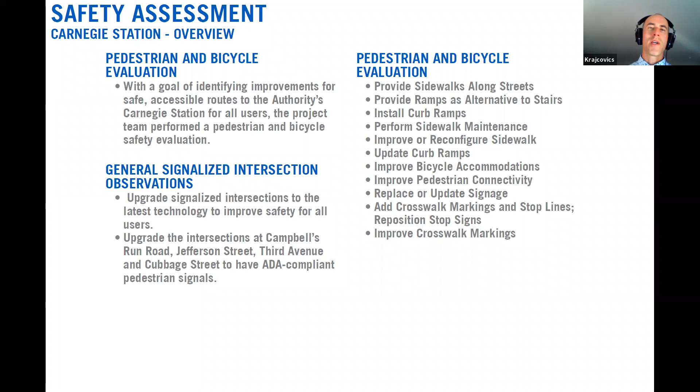Safety recommendations shown here in the bullet list to the right include installing ADA compliant curb ramps, performing sidewalk maintenance, improving bicycle accommodations and connections, and replacing and updating signage. There's also some opportunities for some signalized intersection improvements, specifically along West Main Street that we had noted as well. The following couple of slides will give you a few examples.

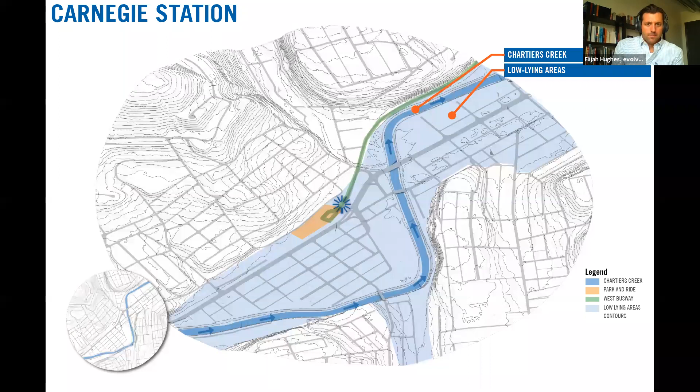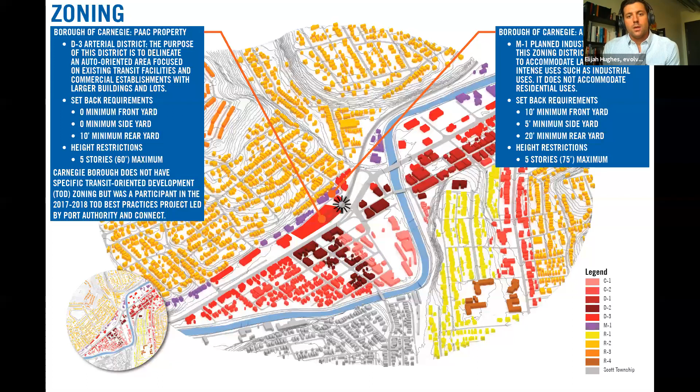You can see everything within that low-lying area on either side of Chartiers Creek, and along East Main Street in particular, is where a lot of the most active uses are within Carnegie Borough. These are the types of uses we'd like Port Authority's Carnegie Station and garage to be well connected to, so people can easily include shopping and working at Carnegie businesses into their typical commute patterns and trips on Port Authority's West Busway. Next slide.

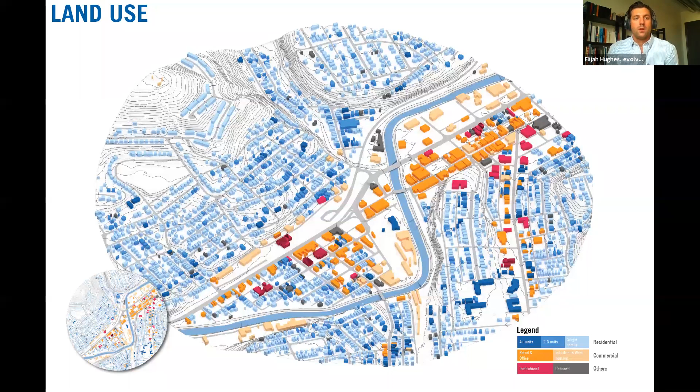So we're looking for how we can improve the places where people can walk, so that when people are getting to the station, it's an easier walk, a safer walk, and a more attractive way of getting to public transit. Next slide.

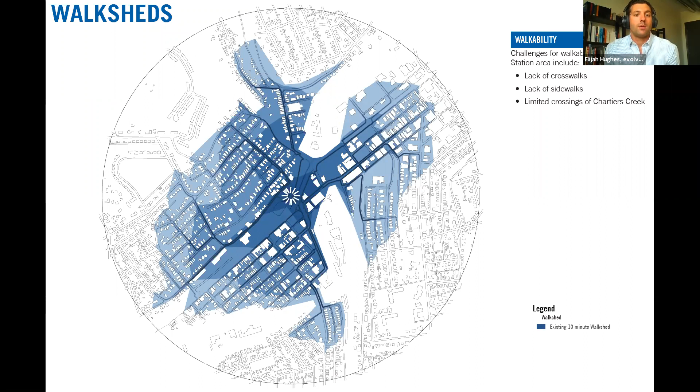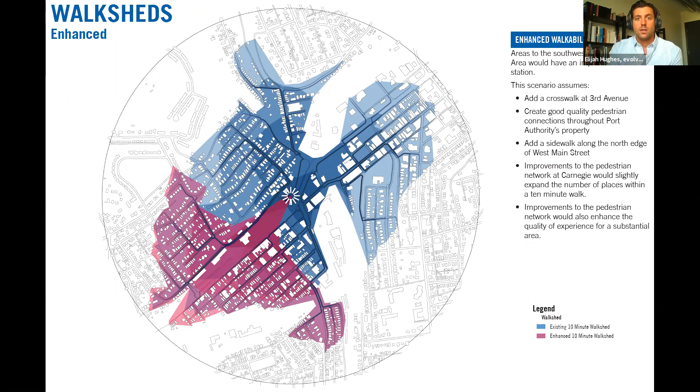Next slide, and I'll hand it off to James. Thank you, Elijah. So as you saw on the previous slides, we looked at the area, zoomed out to the half-mile walking radius. Now we're going to zoom into the site to look at some of the features that are directly affecting the park and ride area.

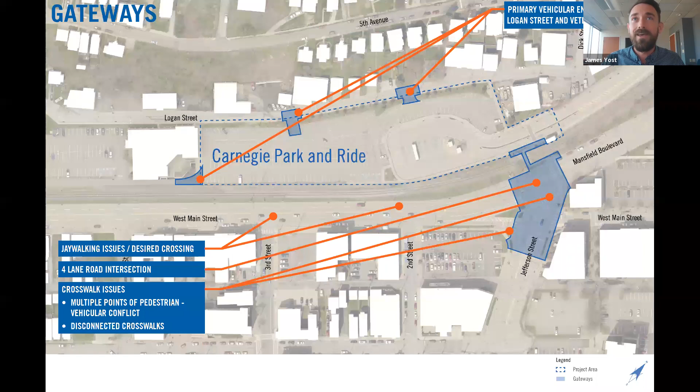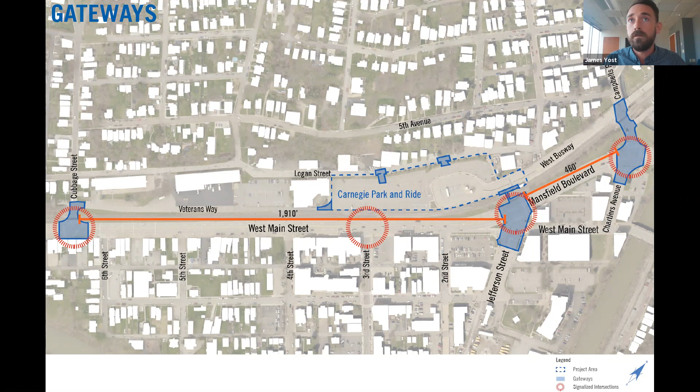And then to the other end of the page, we have the intersection at Campbell's Run Road or Chartiers Avenue, noting how that would be an additional 460 lineal feet from that Jefferson Street intersection.

Zooming into the site a little more, some things we were able to analyze as we got onto the site, looking at opportunities and challenges present today. The park and ride is a surface lot that's roughly 3 acres including the bus turnaround loop, which allows for good flexibility for future placement and construction of the parking structure, which you'll see soon. It's also a very flat lot.

It's something we don't often get in Pittsburgh, but it's a good opportunity at this site in particular. What Carnegie Station also has going for it is significant daily ridership. According to calendar year 2017, weekday average stop use topped almost 1,000 daily users, so that's something to pay attention to.

We also have good access to local infrastructure at Carnegie, providing an opportunity for constructability of the parking garage, as well as potential future TOD. We also want to look at how we can enhance the site overall, including the operation of the facilities of the bus turnaround at this location.

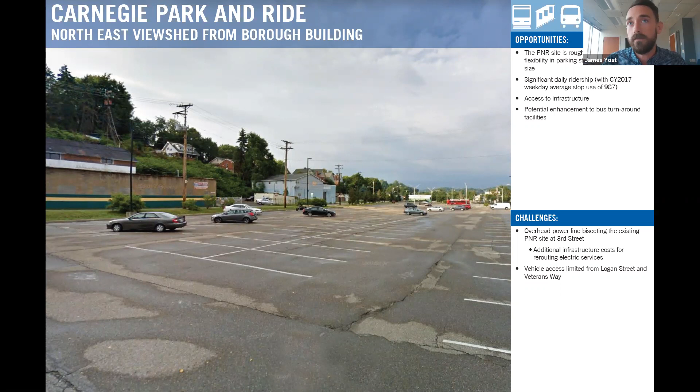Some challenges we do have are the overhead power line that bisects the existing park and ride site. This power line crosses over right at 3rd Street, which could provide additional cost for infrastructure changes in the future if the vertical garage goes in that location. Vehicle access can be considered somewhat limited, as the main points of access are from Veterans and Logan Street.

Turning our viewpoint back towards the Borough Building, some things we can take into view here are our proximity to the Borough Building and its associated on-site employment demand, which is an opportunity for us. The site also has great frontage along West Main Street, with high average daily traffic of over 10,000, which would be very important for any potential commercial tenants to develop on this site.

We do have the non-active rail line located directly adjacent to our site. This is considered both an opportunity and a challenge as it is today, but we realize it would be very beneficial for the Port Authority and the Borough of Carnegie if this is converted to a rail trail at a later date.

We also have the potential vehicular and pedestrian access at 3rd Street. We want to highlight that again as a quicker way to gain access to the site, which would be a great opportunity for the users of the site as well.

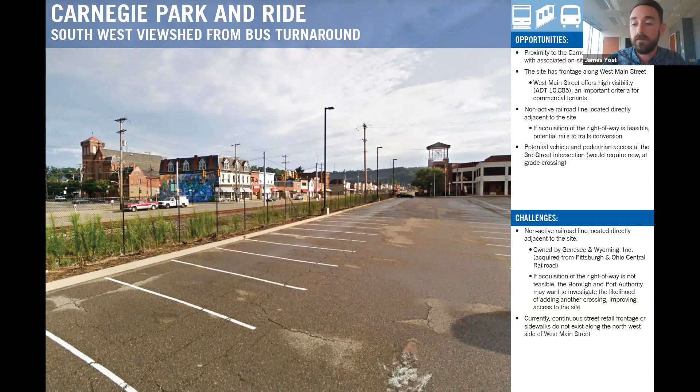Some challenges again, highlighting that rail line as it is today - it is currently owned by Genesee & Wyoming, Inc. So acquiring those right-of-ways is a current challenge, but it's something that should be worked on, and the Port Authority supports that. The continuous retail frontage we have along West Main Street currently doesn't exist because of the park and ride, but that would be an opportunity to address at a later date.

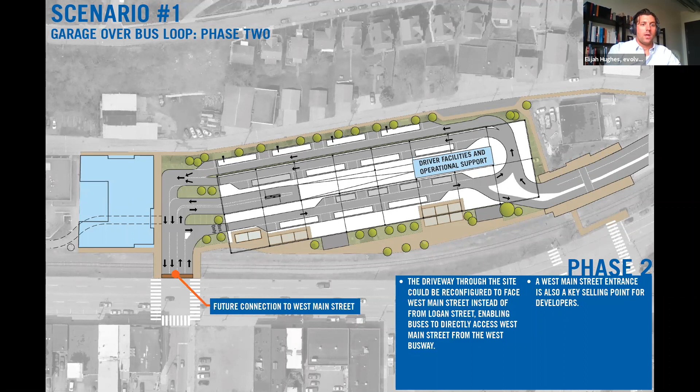For buses, this would allow Port Authority to have easier connections further to the west or to their garage, by providing buses on the West Busway direct access to West Main Street and 3rd Street as well.

For the layover facility itself, we have space for 8 to 10 Port Authority buses, as well as 1 to 3 regional buses. By having this much space, we have some flexibility in terms of how we can use that.

The layover spaces are larger than the layover spaces that Carnegie Station's layover facility currently has. Right now those are sized for 40 to 45-foot buses, which are the single-length buses. We're creating space here for 60-foot buses, the articulated double-length buses, which will give Port Authority some flexibility in terms of what they're able to use on the West Busway and routes in the surrounding area.

There's also space for van services such as ACTA or Access to park their vehicles here, as well as space for Port Authority service vehicles.

In both scenarios, we of course have space for bicycle parking. This is both to serve the current need for bicycle parking and to serve a potential rail-to-trail conversion of the rail line that is not currently in use. That rail line connects all the way to the Panhandle Trail, which connects to the whole Montour Trail network. So by placing some bicycle parking here, or at least creating space for it, we're preparing the site for being that trailhead potentially in the future.

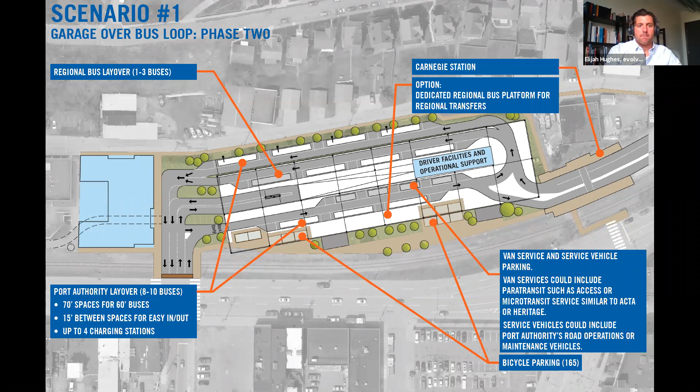Off to the left, we have that blue box that's potentially a site for development in this scenario. Per zoning, it could be up to 5 floors, up to 60 feet tall, which would be about an 80,000 square foot building. There would be the potential for front door facade frontages along both West Main Street and facing into the Port Authority property.

And there's the potential to configure that site in a couple of different ways, either continuing to preserve access from Veterans Way or using that for loading dock access.

There's also the potential for a little bit of infill retail, something like a coffee shop or a convenience store underneath, tucked into the garage a little bit, facing West Main Street. It would be a little bit challenging, but we are leaving space for that if the market supports it.

There would be a pickup and drop-off area along Logan Street. So if you are dropping your spouse off, perhaps at Carnegie Station, or picking them up when they come home from work, there would be space to do that on Logan Street.

And then there would be second, third, and fourth floor parking in this garage, for a total height of 4 stories. In this scenario, that's 465 spaces, which is more than is needed to meet the requirements of the CMAQ funding that Port Authority is receiving.

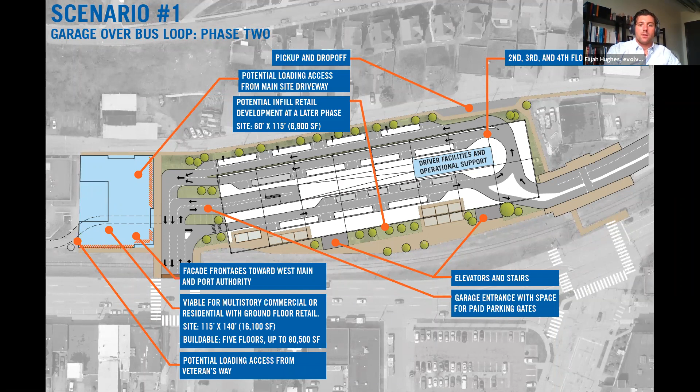And so the next scenario, which James will go into, I think provides a more attractive, more usable, more functional alternative to this scenario.

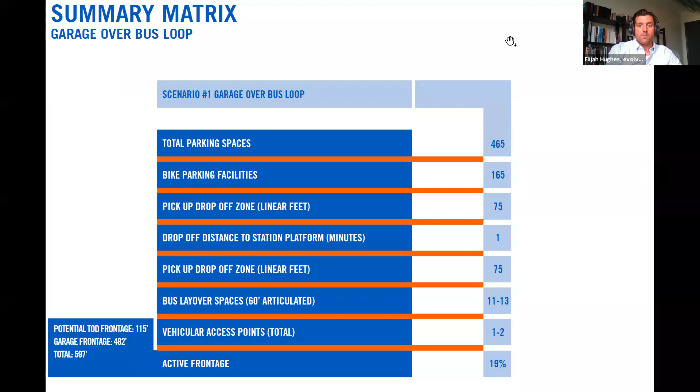So scenario 2, as Elijah pointed out early on, is that we have placed the garage in this location adjacent to the Borough building off to the far side of the site. This allows for an open air, yet expanded bus operations turnaround loop towards the back of the site.

This loop can then be enhanced and concealed behind potential future TOD development along West Main Street, allowing for new public spaces such as plazas for those using the rail-to-trail conversion, hopefully in the future, as well as those using the parking garage and enjoying a restaurant at the ground floor of this potential TOD. We're designing the space to be all-inclusive for all potential users, creating a space that could be a destination within Carnegie.

As you can tell here, the garage is adjacent to the Borough building, tucking the overall loop access towards the back. We have the drop-off location and ADA parking for the site with access off of Logan Street, and we're doing site enhancements to the station area platforms that allow for better connection as you're crossing at Jefferson Street to come into the site overall.

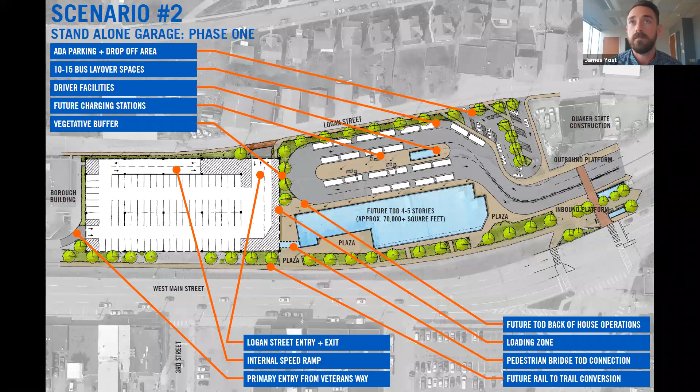Looking at the phase 2 options, we consider how to connect the bus loop to 3rd Street and provide buses access to that, eliminating the longer loop they would otherwise have to make. The way we wanted to do this was to look at minimal infrastructure changes to the site, focusing on those vegetated buffers.

We would have to cut through those buffers and allow for the bus loop to add new curbing and asphalt, but it can easily connect to the garage area itself, which would allow access to 3rd Street. This 3rd Street access is capable of being used by anyone needing the garage, but also for the future bus connection as well.

We are maintaining the other access points at Veterans Way, as well as the entry and exit at Logan.

So just highlighting again what we said, we would maintain the entry and exit point at Logan. We are allowing for the bus access road, which would have solid barriers to keep those areas separate from the rest of the vehicular operations happening inside, as well as have that area gated. We have a large striped area to show that this is still able to be used for the future TOD back of house access, for loading and unloading of services, or maybe a dumpster pad that would have to go back there.

And then the site enhancements, of course, that would have to happen at 3rd Street, allowing for new crosswalks, easier access, and signalization improvements that would need to happen.

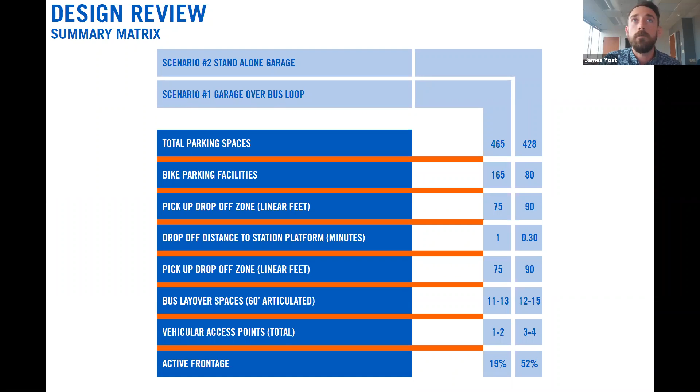And then next, we wanted to show you the potential of this, throwing together some concept renderings of perspectives just to show general massing that we're looking at here, some notes that we wanted to take from the local architecture and how we could see that tying into the building. But again, this is just conceptual, and this will be later developed in the next phase.

So vantage point A, we're looking as if you're standing at the intersection of 2nd Street and West Main, looking back, and what we'll see here is the garage will be in the distance. You'll be able to see the Borough Building Tower over top of the garage, as well as some architectural character tying the two structures together, as well as some public spaces that we're showing within this.

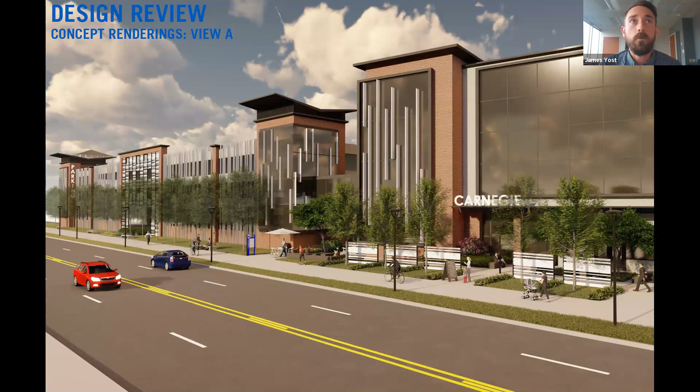So here you can see what we just pointed out. In the distance here, you can see that the Carnegie Borough Building Tower stands at right around 62 feet in height. The garage itself is hitting right around 55 feet in height, maxing that out to where we would see 4 stories for the garage. Ground floor of the garage does have to be higher to allow for potential bus access to go through that, so we have that at 16.5 feet, with the other flat decks having ceiling levels of 11 feet in height. We could potentially go up to 12 feet as well and stay within those zoning limits. And then the TOD space as well could be a 5-story structure, reaching that 60-foot max per the zoning code.

What we kind of see architecturally, what we're emphasizing, is we don't want the garage to just be a deck and nothing else. We want to bring in some interesting character from Carnegie, bringing in some of those tones of brick material, and modernizing as well with some curtain walls of glass, bringing in aspects of potentially metal that could be in these vertical and horizontal slats just to provide some additional interest. So you're not only looking at the facade of a garage, but really wanting to pay attention to make something that's a bit more complementary to the neighborhood. And then looking at a TOD building that could potentially be there one day as well, just seeing how those two can relate to one another and bring in pieces of Carnegie's architecture to this site as well.

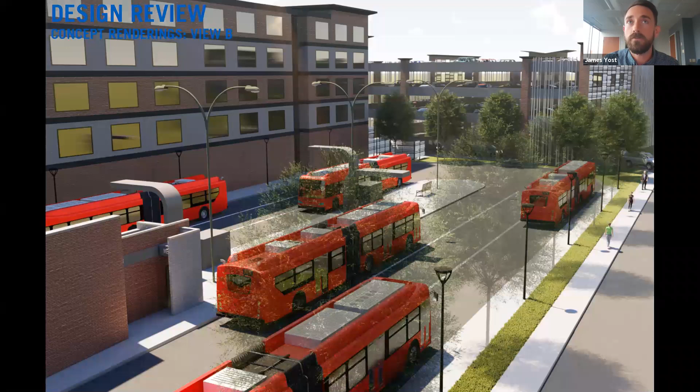An additional view we want to take is from the rear of the site, looking back at Logan Street, so we can see what that operations looks like on the bus turnaround loop and the rear side of the parking structure. We condensed the width of the overall bus turnaround loop, so all the buses are parking parallel, which allows for condensing, narrowing out, and elongating that loop so it allows for potential TOD to be included in front of that.

We have everything contained for the drivers themselves, for their comfort facilities, as well as charging stations, all included with that internal island. Some new vegetative areas along Logan Street here with nice sidewalk improvements, new lighting, and additional vegetation, and then looking at how some of those characters of the architecture from the parking garage can tie into the backside of that as well.

With that, we conclude our information part of the presentation, and we'd like to open it up for questions. I'll allow Moira to explain again how that works for everyone.

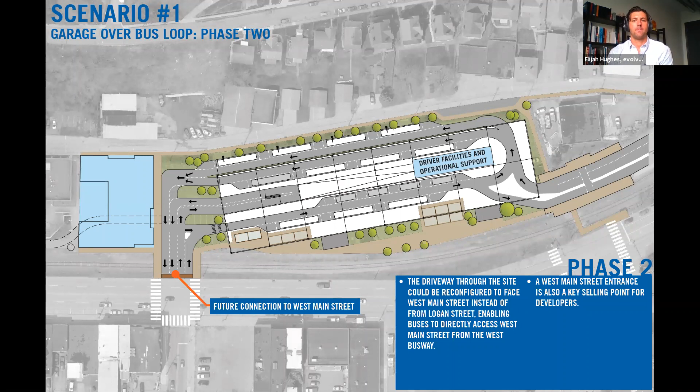Thanks. Okay, let's see — so the next question in the chat is: charging for electric buses was mentioned. Is an option for electric vehicle charging for the general public included in any of the garage options?

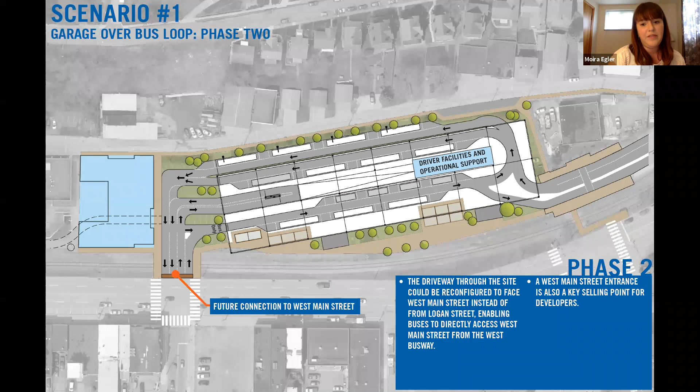That's a really good question. I'm not sure — I think it's something we've vaguely talked about, but it seems like something we could keep in mind for future designs. I think there was talk of an area in scenario 2, in the first phase, having kind of a set-aside for special uses like that. So it's definitely something we can consider going forward. I think that's a great question and a great suggestion.

Let's see — so how do we persuade PennDOT to narrow a road? That's a very good question. It's tough. Breen, I can defer to you on that kind of process and how we have those conversations.

Sure. So one of the key things is us all being on the same page. If the community supports that, and the borough is willing to be an active partner with us in having those discussions with PennDOT, that's a really good first step. They still don't have to listen to us, and that's the reality of the world we work in — believe me, I feel it almost every day. But PennDOT does have a program called PennDOT Connects, which is different than the organization Connect.

And we, as Port Authority, keep a really close eye on that program. We now even have a staff person on this call with us, Craig from Port Authority's planning department, who helps us keep an eye on that program and work with PennDOT to make changes — usually small changes, but if they're big changes, then we've got to find money to do it — to the design of their projects at an early stage. So if they're going to do work, we can come to the conversation and say we have a plan, and having a plan is really, really good leverage in those conversations. So it's somewhat useful for Carnegie Borough or Port Authority to go to those conversations with PennDOT and say we've been talking about this, or we know from practice that this would be really useful for us.

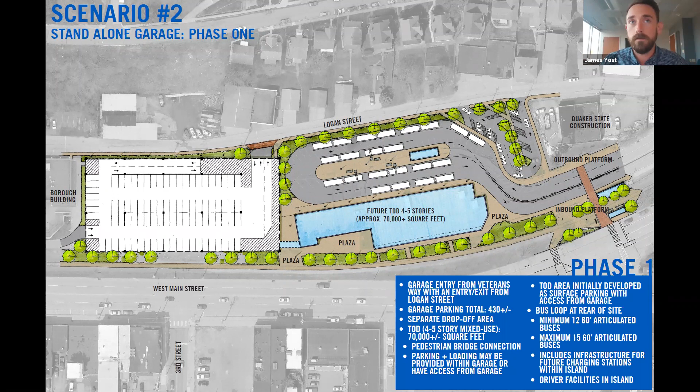Sure, yeah. Anytime that we do design, we always think of CPTED, which is basically designing around safety of pedestrians practices. So in scenario 2, we're thinking about how do we keep that completely open and well lit at night. In some of the renderings we showcased, we were showing wide open pedestrian spaces that have adequate lighting and clear vegetation that allows for good see-through for anyone that's driving through.

So it is a very well secured design, allowing so that you don't feel like you're in any uncomfortable or dark areas, essentially. So we always take those considerations whenever we're doing general conceptual design and then moving forward. Here we're kind of conceptualizing where lighting might go, but in the next phase of the design, we'll move that into a reality considering the actual lighting.

Great, thank you. Next question: will the parking lot remain free or will there be a charge to park here? Carnegie's businesses often note lack of parking as an issue locally, and can visitors park in this garage if they are not going to ride the bus?

Well, I think we don't really know, basically, is the answer to that. We haven't charged for parking in the past, and it's not something we have concrete plans to do, but that could change someday. As of right now, we're not planning to charge for this parking lot.

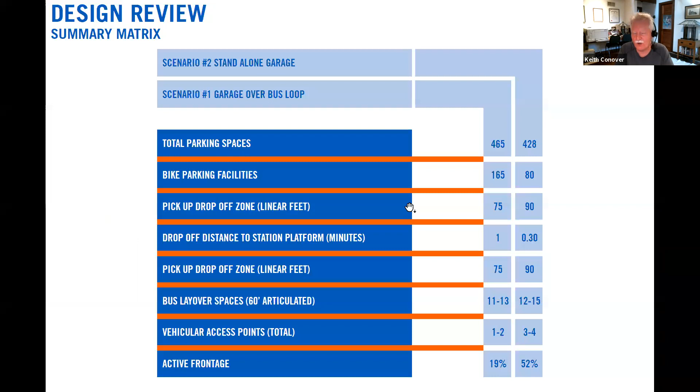My question, it was also a little bit in the chat, is that both scenario 1 and phase 2 of scenario 2 are dependent on getting across the railroad tracks there. About 10 or 15 years ago, a large group of us from the Planning Commission went out and scouted on the ground the route from Walker's Mill, where the Panhandle Trail currently ends, down to the Borough Building, and realized there's a choke point. You can't do it parallel to the tracks, and the only way would be to get the railroad to give up their right of way. It turns out they had absolutely no interest in that, and we just gave up on it. So both of these are dependent on that.

Has anyone approached the railroad? Is there any interest on their part in giving up something they have absolutely no requirement to give up? Because they didn't even want to talk to us.

I know that the Port Authority supported an Active Allegheny grant that Carnegie applied for to do that very thing—to talk with the railroad about this trail and try to get somewhere with them on that. We were very supportive of that project. I'm not really sure where it stands right now in terms of the grant and how far along the project or those discussions are, but Steve, did you want to jump in and talk a little bit about that?

Absolutely, can you hear me okay? So just like you said, with the start of COVID things kind of fell off with the momentum on moving forward with it, but we did receive the funding through Allegheny County, and we had the opportunity around last Thanksgiving to take a walk down towards Collier and basically continue our process with our research. That's kind of where it ended at that point. But in working with the staff from Active Allegheny and Allegheny County, we've been doing our best to make contact with the railroad so we can bring up these items we're looking to research. So right now we're looking to get started with that process, but we are still moving forward. That's the update I would give. Great, thank you.

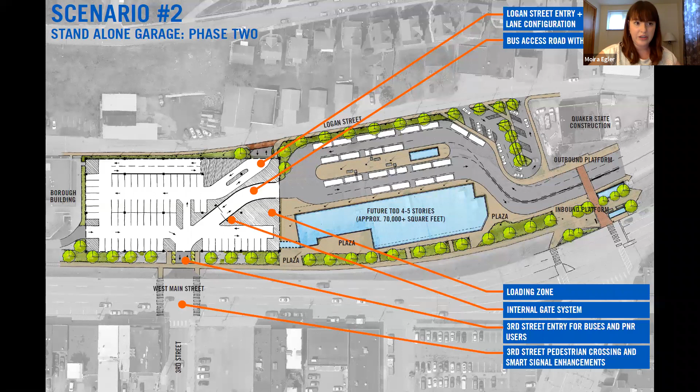So I thought it was a good discussion, and I think we talked about that, right? Am I missing something? Yeah.

Well, I think in addition to what you just highlighted, I think what Owen was getting at is that what we sort of skipped over in addressing the zoning comment was the opportunity that we are building into the garage by having flat floor plates and assuring we have a minimum height that takes this into consideration. We can design a garage that could be converted to uses occupied by people in the future. So the additional density — there is an opportunity to add density to the site, to add transit-oriented development, not through height, but through converting parking to other uses in the future, if that is something the community and the market would support.

Yes, thank you, sorry I skipped over that part. I'm also gonna jump real quick. Sorry. Considering there was like a dozen or two—

We can't hear you, Craig. Your audio is quiet. You can type it into the chat box, try to resolve that.

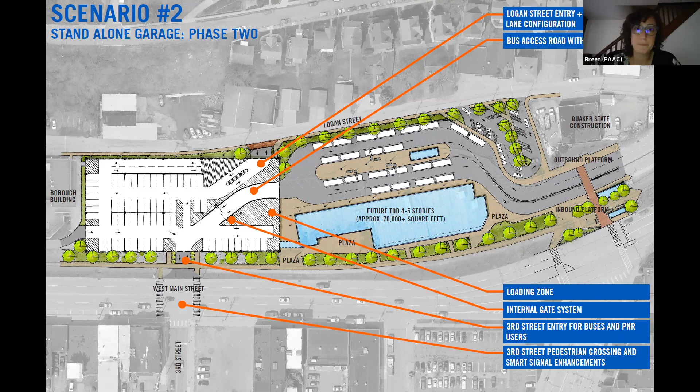I think we are wrapping up here, but we have a couple more questions and comments. Allison has another comment: it would be helpful if Port Authority could show what the future development spaces of both scenarios could be used for in the meantime, whether they'll be green space or used for events like farmers markets. That may make a big difference to many people.

That's a really good comment, actually. Since we are showing two different phases, I think that's a good thought, and I think we can try to work on that for sure.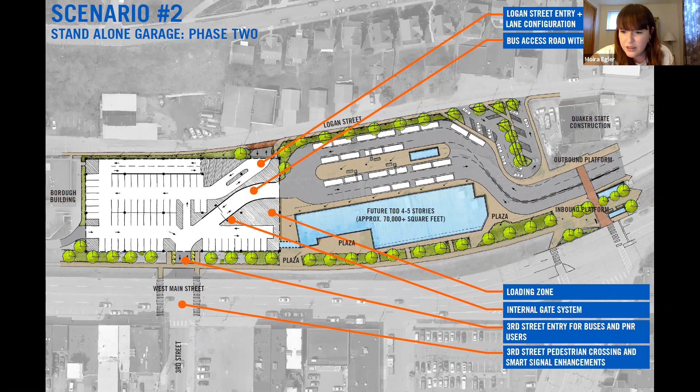How many spaces is the parking garage, asks Craig -- I think he's looking to make a point about the impact on traffic. If there's more than one entrance, it would be distributed to some degree. We're really concerned about the phase one issue in terms of Logan Street. We may not be -- the 3rd Street entrance, and that being a possible additional entrance, is contingent on a lot of external factors.

We have time for one last question here: can we display any plans or coming soon renderings to get excitement or buy-in from the community?

I think maybe. Basically the next steps -- that's a good segue to what the next steps are. The next steps are for us to narrow this down to one of these two scenarios, and then to take that scenario to what's called 10% conceptual design, adding a bit more detail to really give you a better idea of what it would look like from the neighborhood, from downtown Carnegie. At that point, that's probably the design you'd want to display to the community, I would think.

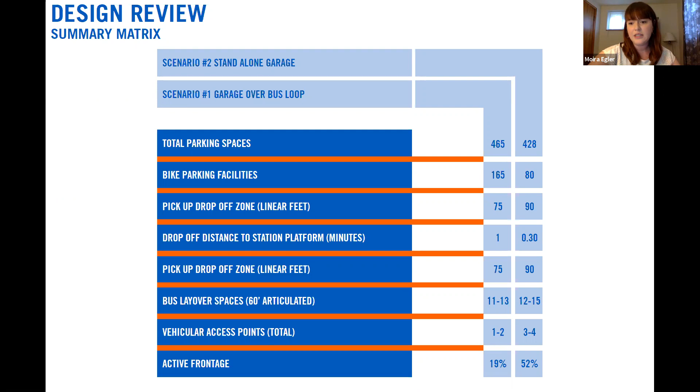I'm not sure if we've done that in the past on previous Port Authority projects, if we've posted plans at our stations anywhere to get people's input and feedback that way. But it's a good idea for sure to generate buy-in -- it's a good consideration.